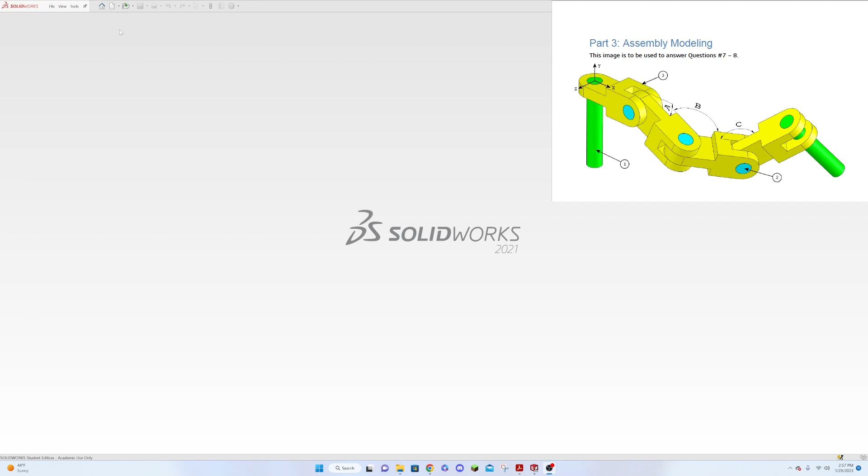What we want to do is go up and say New, then say a new assembly, and click OK. This is the start dialog we get when we start a new assembly.

It's actually looking for the part we're going to bring in. But before we do that, we want to look up at the assembly and notice what order it makes sense to bring parts into. We can see that this pin, the long pin, is fixed at the origin—the top face of that is fixed at the origin. So we want to bring in that piece first. That's going to be our fixed piece; everything else is going to float.

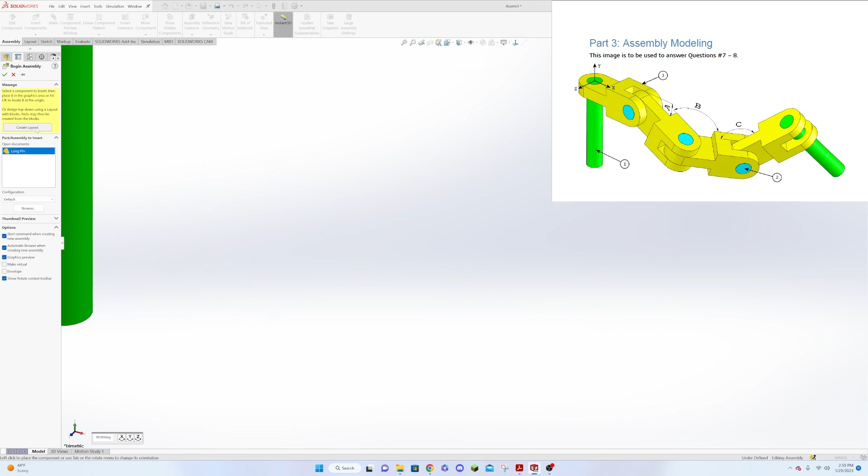So when we go about this, we'll go to where I have everything saved and open up this part, and we'll bring in the long pin. I say Open. Now you'll be tempted to just bring this in and click right away, but we don't want to do that. Instead, go up and click the green check mark, and that brings it in.

Now if you look at where our origin's at, it's centered that origin onto the center of that pin. So now this pin is fixed where we want it to be, and we don't need to worry about moving it around—it's the orientation that we want.

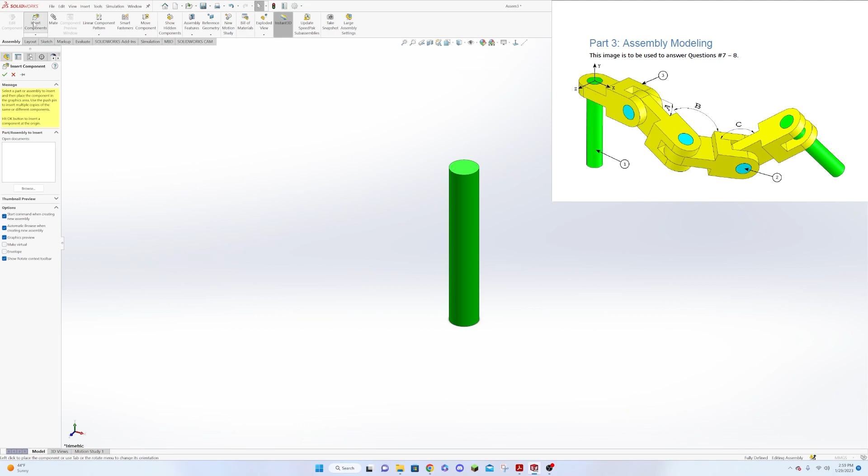Now we're going to go up and insert some more components. We're going to bring in a chain, and we're going to bring in another long pin and a short pin. We can just bring those both in at the same time. And here's our short pin.

Okay, so all of these are now floating except for this one—this one's our fixed piece, so it doesn't move around. All the rest of these can move around. If we look at the drawing, we can see that we need 4 of these, 3 of these, and 2 of these pins.

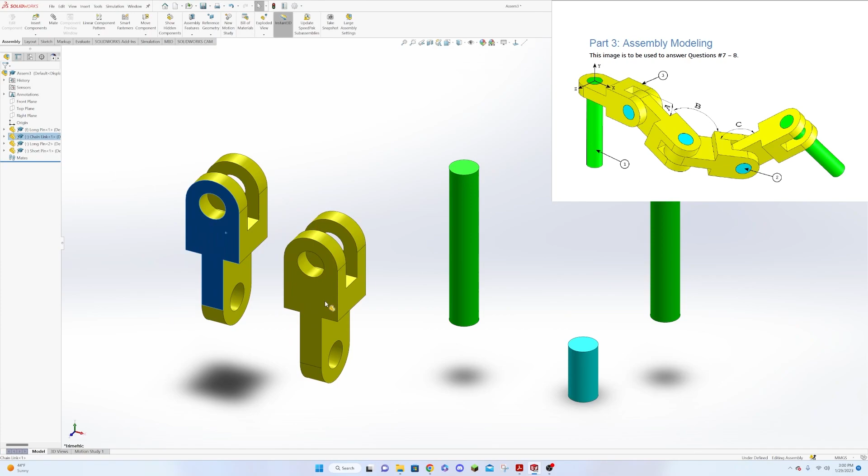To make more of these, push and hold Control and click on the body you want, then pull it away, and click again to pull away another—now we get 4 of them because both were still selected. For this one, push Control, get one, click off of it, and get another, so we don't get 4. Now we have all the parts that we need.

The assembly for this is actually relatively straightforward and simple. We can see that we've got some concentric assembly, and then some coincidental surfaces that are going to match up.

We'll start by clicking on the inside of this circle here and on the shaft, which brings up our mate options—so we're going to pick concentric. You can see that flips it around. Now we can click on this face, push Control, and click on this other face, and select coincident, which brings that up.

Now you'll notice that in the drawing, this face here is running parallel to our XY plane—so if we look here, that is our front plane.

So it's going to be running parallel to that. If we click on that face and push Control and click on the front plane, we can make them parallel. Now those parts are parallel to the front plane. This piece is still fixed at the origin, and this piece can't spin now, so it's locked into place, which is fine because in the drawing it shows it in that orientation.

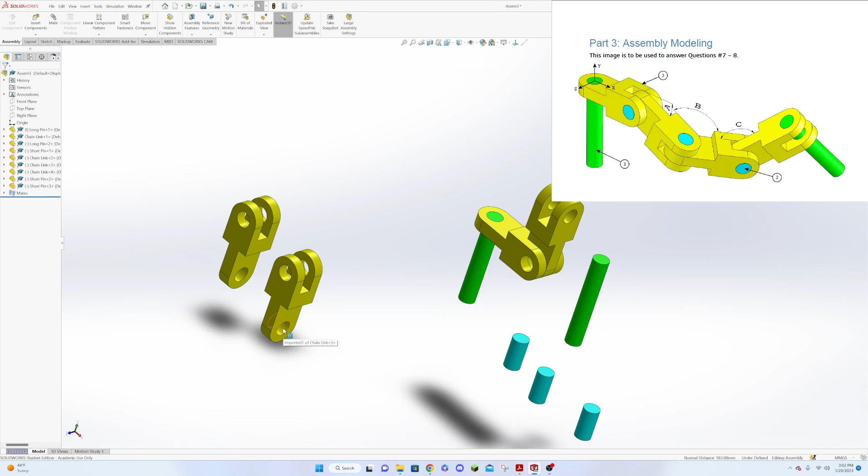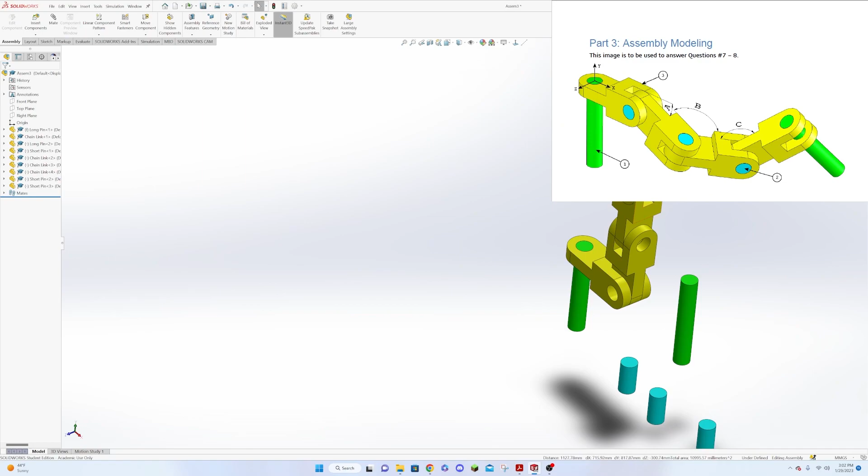And we can just keep going like that with all of these pieces for right now. So we'll click here, concentric, and this face, this face. Oh, I forgot to push control. Control on this face. Coincident. Here, here, concentric, and this face, and that face. Okay, so that's got all those locked in.

Now we just need to put the pins in. So we can click on there, and click inside here, say concentric. Then we click on that face and this face, line them up. Click here, concentric, this face, that face, coincident. Here, here, concentric, and this face, that face, coincident.

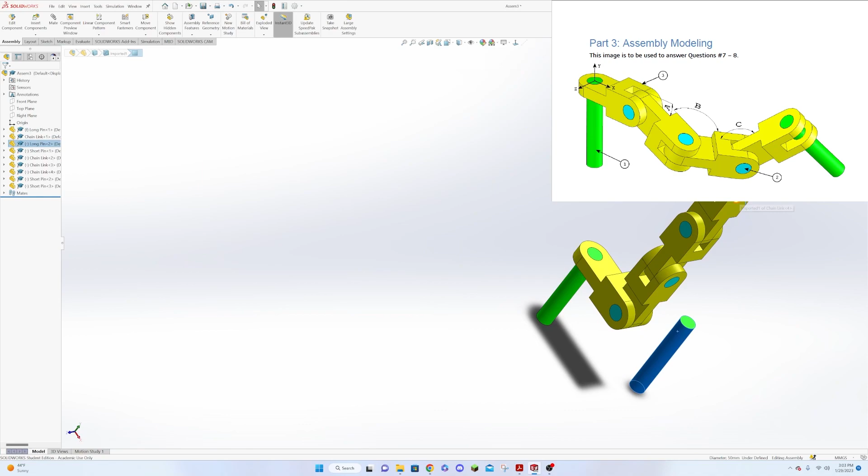Alright, and then our final piece is going to be this here, and this line here. We're going to say those are concentric. And if you look at the drawing, we want this to go in a downwards direction. This is going to be important - we have to have everything built correctly, because what we'll be testing is a center of mass on this. So now we click on this face, push control, click on that face, and make those two coincident.

All right, so there we go. That's our completed assembly. So like I said, it was relatively simple. And you can see now that as we move pieces around, we can see this in the kind of orientation that we have for the drawing.

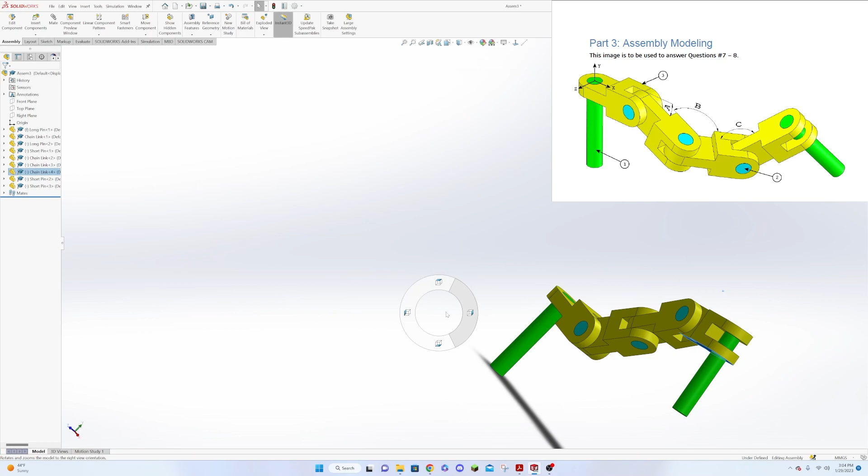So let's spin here and get ourselves roughly into the orientation that we see on the drawing. Okay, so we can see that this one needs to tip in a little bit. This one we want to bring it down. We'll tip this one in a little bit more and tip this one back a little bit more. It gives us roughly into the same orientation that the drawing is, and that will help us out a bit here when we're putting in our measurements.

So now the next thing we want to do is we want to do our angles for this drawing. If we go over and look at the document and scroll down, we can see here we have an A, B, and C. And you might be tempted to use the global variables, but you don't have to do that with this one, just because we're only going to be manipulating this a few times. It's honestly a little bit more work to go do that, where you can just enter these in and call it good right off the bat. So we have A equal to 25, B equal to 125, and C equal to 130.

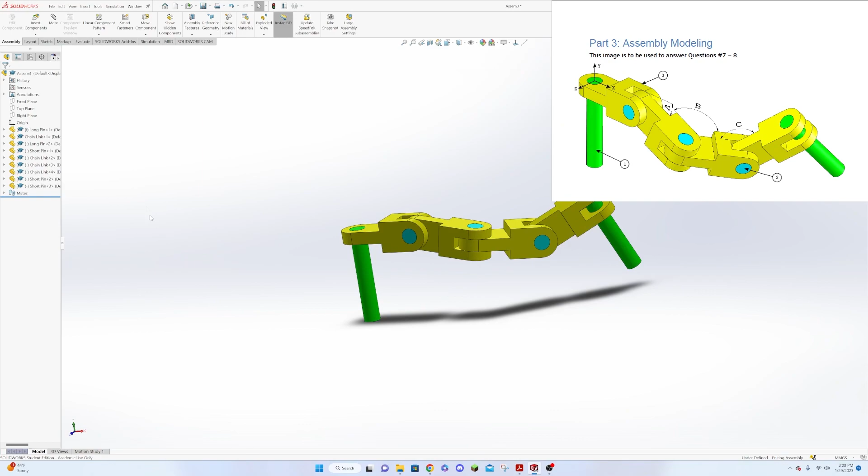But we can go in here and go into our mates dialog. What we want to do is click on this face here, then push control and click on this face here. And so it automatically asks, are we doing angles here? We can go down here and say angle.

And you can see here that if we type in 25 and push enter, it turns itself inside out. So we want to actually change the relationship of that so that we have that there. And then we want to flip this direction, because you can see that it's actually angled down. So basically what it's doing is changing how the mate alignment is set up. So if we flip direction there, we now have our angle correct. And so we say okay.

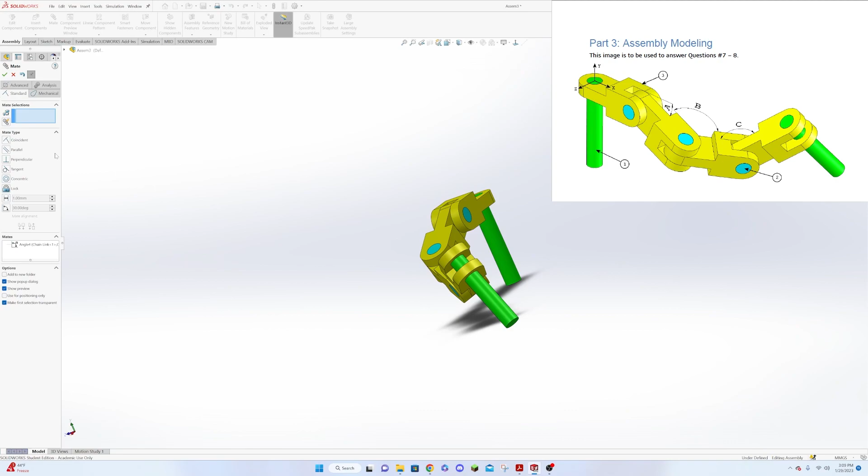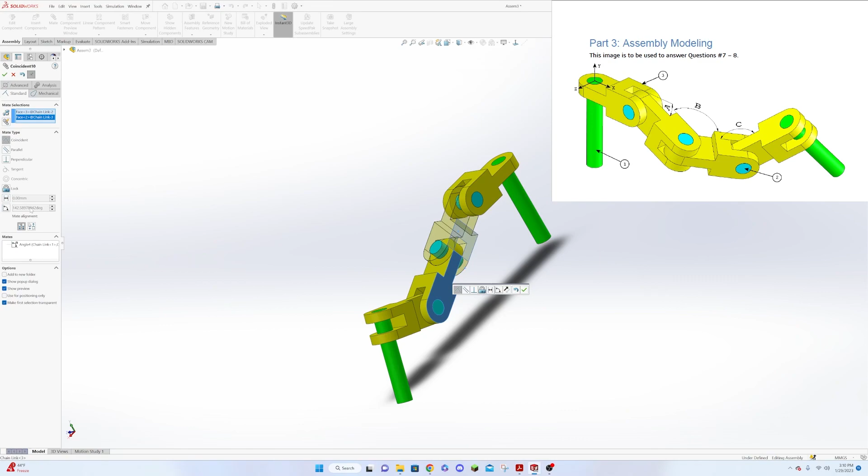And now we can continue on inside this dialog. You don't need to close the mate dialog yet, just push enter and that sets up that mate. So now we have our angle between this face here and this face here. We're going to click on that face and click on this face. Our angle here is going to be 125. And you can see there, we didn't actually have to adjust what our relationship was.

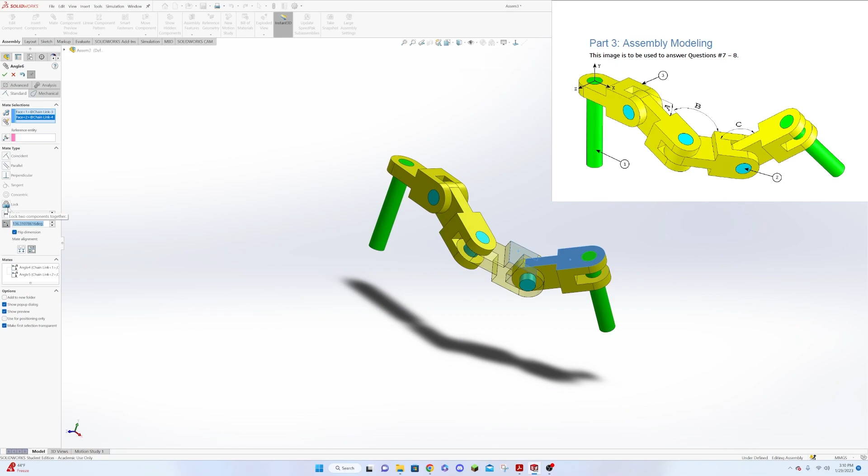Then finally we have this angle here between these two faces. So now we can say enter, and now we can click on this face here and that face there. And we can go to angle, and it's going to be 130. Let me say enter. All right, and so now we have our orientation of our part in the angles that they wanted it to be in. So we say OK, push enter, and then we can click the checkbox, and we see we have our part here. So that's our mates all done for this, and for this part of the question.

Now the next thing that we want to do is we want to go in and figure out what our center of mass is for that. So we do the same thing that we did before. We say evaluate, and we go up and we go mass properties. None of the mass properties, you have your mass like we had before, but then down here we have our center of mass for our x, y, and z. And so we have the 348.66, negative 88.48, and negative 91.4.

And we see if we look in the PDF that A is our option for that. So it's kind of nice that they have multiple choice at the beginning here, because if you didn't have anything that was close to any of these answers, you'd kind of be wondering what you were doing wrong. So this gives us our value for the first one.

And now what we can do is we can close this assembly here. We can scroll down in the document, and we can see that they want us to modify our piece again. Basically all we're doing for this is just changing those angles again. So if we go to our mates here, we can go down to our angle. We have this angle here. We can actually edit that angle, and they want that angle to be 30.

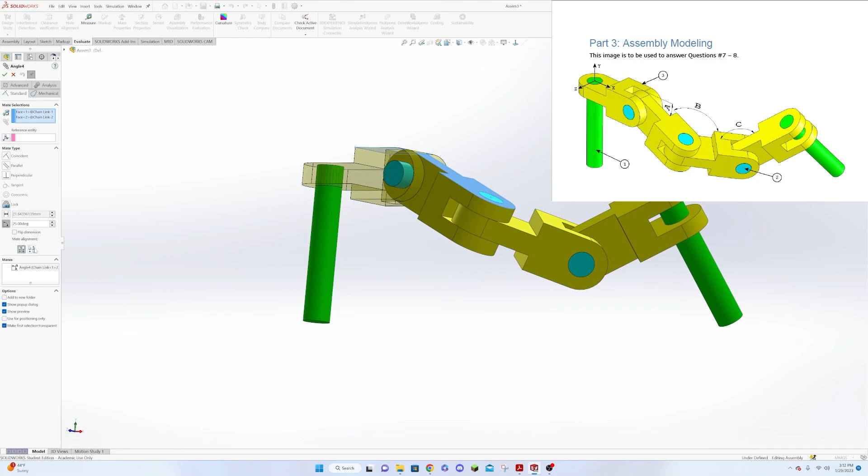We say OK. Edit this angle. They want that angle to be 115. Okay. And we can edit this angle, and they want that angle to be 135. All right, and so we say OK.

And now we can go up and we can go under evaluate again. Oh, we want to get out of our mates. We can go up to evaluate and we can say mass properties. Once again here, now we have different values for our center of mass, and we would write those in. So in this case, we'd have to write in our center of mass. Don't forget your negative values for your x's and your y's, and in your z's, just in case they're there. It does make a difference on what your center of mass is.

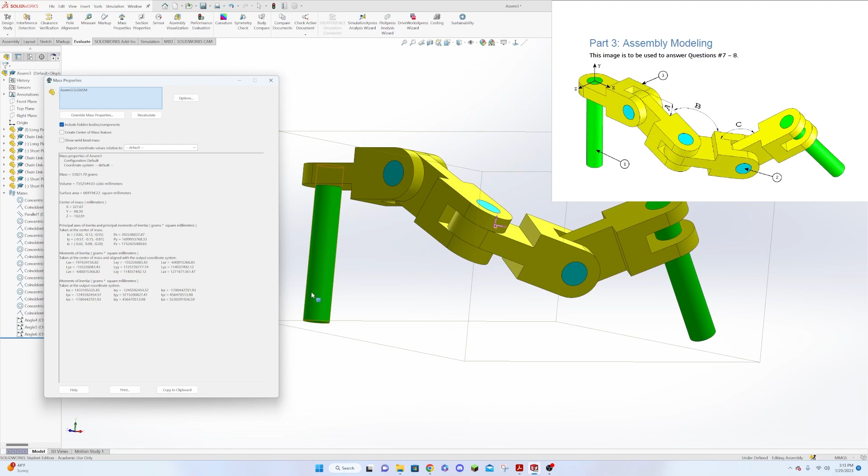So that's the assembly part for the practice exam, and it's pretty simple. There's no mechanical mates or anything like that, or advanced mates that you would have to worry about, no gears or anything like that. It's pretty simple assembly. So that's that for this, and if you got any questions, let me know.